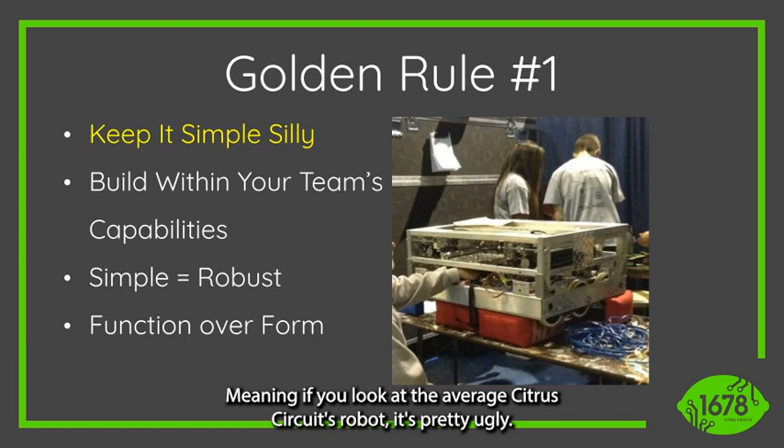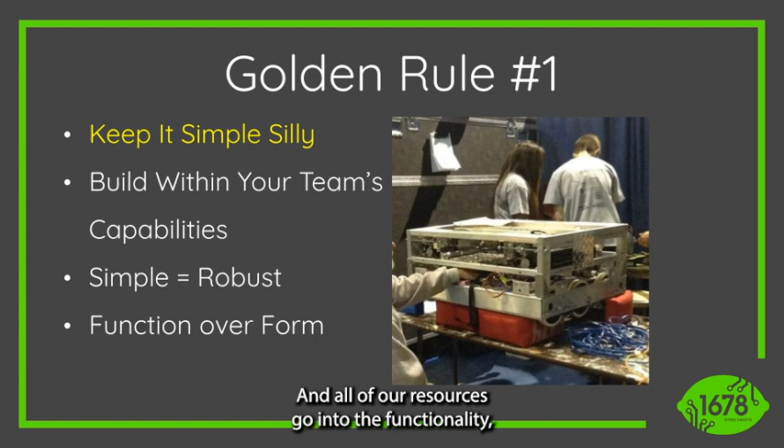This is a Citrus specific portion of flavor, but I think it's worth mentioning: we prioritize function over form. Meaning, if you look at the average Citrus Circuits robot, it's pretty ugly. There's probably going to be better looking robots at the competition, but we prioritize the function over the appearance of the robot. All of our resources go into the functionality, and we spend basically zero time on how it's going to look.

So what's the purpose of the preseason? The preseason is not a break. It's the time to train your students, try out new designs, practice new topics, and learn and research past FRC games and designs. This is the time when you have the most free resources to try new things, and spending the time as a break is a missed opportunity.

Here's some ideas for off-season projects. The training in the off-season is really important, and projects are a way to flesh a lot of different aspects of your team's workflow out at the same time. So it's not just exercise for the design team members, but a lot of these will encompass multiple areas of your team, from purchasing parts, bringing parts in, fabricating parts, obviously designing the parts, but then assembling them, wiring them up, programming them.

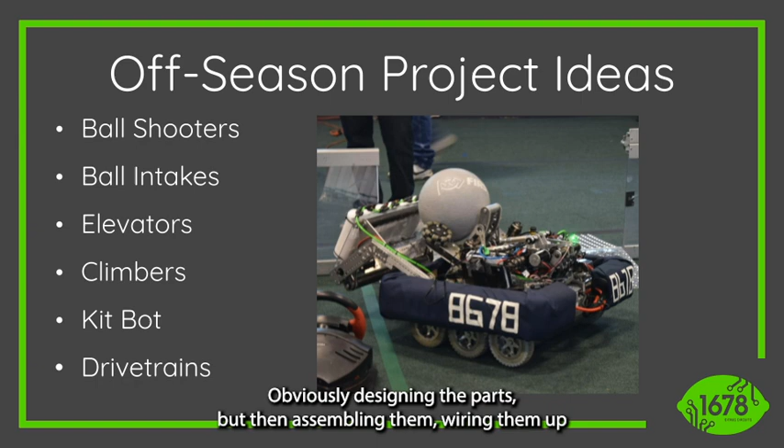So it's important to learn FRC history. FRC games are extremely repetitive in ways you might not necessarily think about. In most of the last 10 years, there's been some form of climbing. There's been 2 examples of inflated tubes, 3 if you include the inflated cubes in 2023. There were 2 examples of exercise balls. FRC is starting to love the concept of foam balls and foam game pieces, and learning how those kind of compress and shoot is something that can carry on from year to year.

And flat discs is another concept that they're trying to stick with lately. The more you learn about FRC games, what was the meta, how many game pieces were teams able to score, how did teams go about scoring the game piece, can be directly applicable to this year's game possibly.

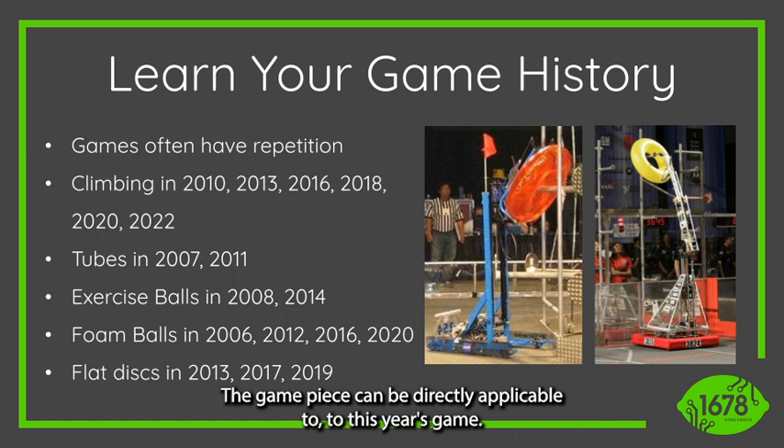Great, and that takes us into golden rule number 2. This is the second one to write down: steal from the best, invent the rest.

There's quite a few other seats if you guys are willing to spread out a little bit. There's some seats around here if you want to sit down so other people can come in. Find some open seats, there's plenty.

Thank you. But the key principle here is that, like Austin said, a lot of the games are repetitive, which means a lot of the solutions that teams have come up with are similarly repetitive. So you don't have to, as an individual designer or coder, come up with all these unique ideas. You should start with precedent, doing research, finding out what other teams have done to solve X, Y, and Z tasks.

We'll talk about this later, but this cranks up to 11 once the season starts and other people start releasing their ideas for the current game. But doing your research about past games is also really important.

There's some teams to look at. Currently, teams like 581, 2056, 6329 - these are great examples of teams that find really simple and elegant solutions to complex problems. If you're wanting to look at these robots from the past couple years, I encourage you to.

Some examples of stealing from the best and inventing the rest that 1678 has directly benefited from include our 2013 robot, which didn't start out like it looks in the upper right-hand corner. It started out as almost a totally different robot, and through the course of the season, we copied 254's intake and 973's shooter to make an amalgamation of the two that became our first robot to get to Einstein at the championship level.

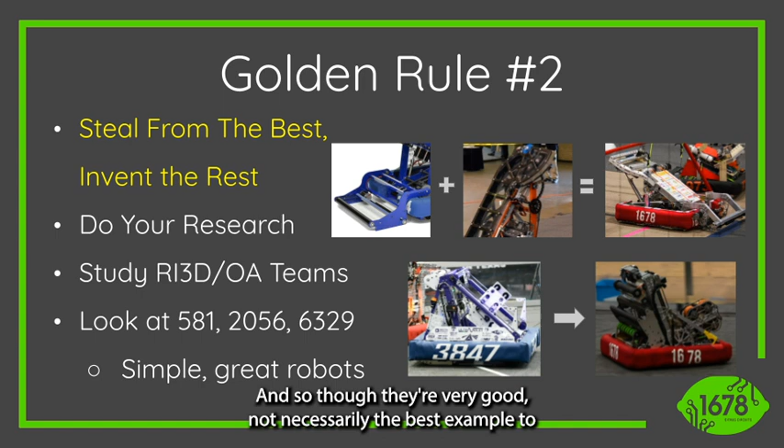One thing I did want to say, as a general rule though: don't copy 971. They build very complicated robots, and though they're very good, not necessarily the best example to copy from.

Golden rule number 3: use a proven drive base that's right for you. What we mean is if you've built an off-season robot or in another season with a drive base, you have experience building, designing, and programming that drive base, so you can quickly assemble it during the first week of kickoff. But if not, the Kit of Parts drivetrain is designed so the game can be played with it - they even sell wheel adapters at AndyMark.

So it's always a good solution for the game. I know Swerve is flashy, but if you haven't had practice putting it together and programming it during the off season, you're not going to be successful putting it together during the build season while also building a functional robot.

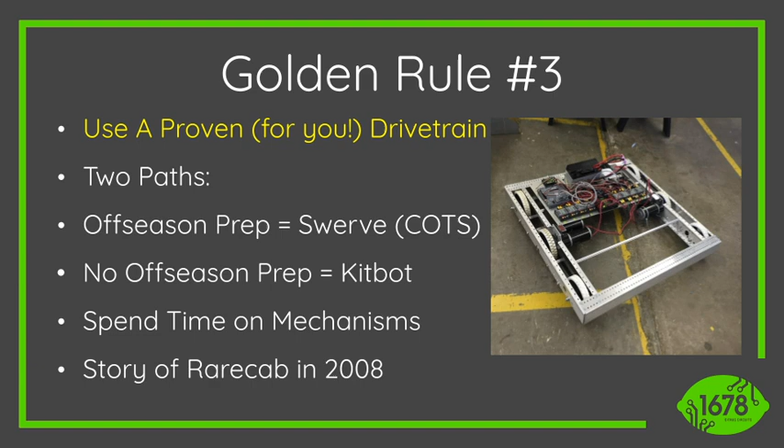The game that year had 2 components. There was a large 40-inch exercise ball that you had to launch over a high-jump-like bar, over and over again. The field was broken up with a fence in the middle, forming a little racetrack, and you were only allowed to drive counterclockwise around the field. But there were only 2 of those big 40-inch exercise balls per alliance, and there were 3 robots per alliance, so one robot wasn't going to get to launch the big exercise ball.

So this was right before I joined the team. 1678 that year decided they wanted to be the third team on the Alliance and just race around the field. And they thought the fastest way to race around the field would be to build a race car and do this totally new style of driving for them, which was Ackerman steering, where the front wheels steer just like your car and the back wheel drives.

Well, this is very different from most robots back then, which were tank drive robots. And they threw out the kit of parts tank drive that they got for free, and they instead built this crazy Ackerman steering robot. Well, this thing never really worked. The potentiometers that controlled the steering were always going out of function.

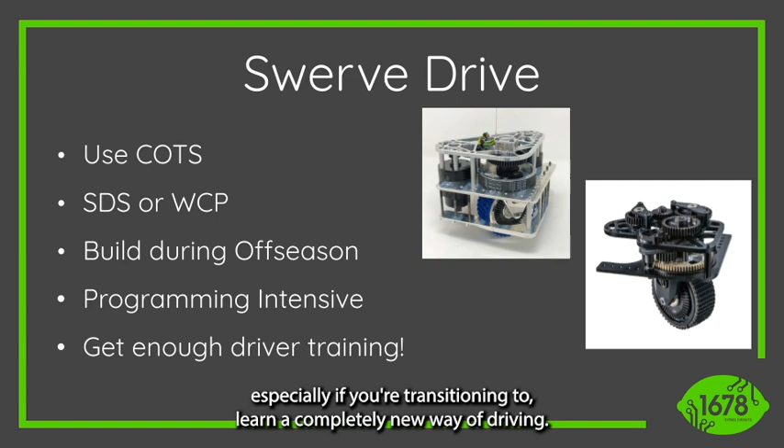Our driver is right there, and I'm sure that he can attest that it would be very different than the standard tank driving. So it's really important that you give your driver enough time, especially if you're transitioning, to learn a completely new way of driving.

All right, so let's briefly touch on mechanism design, some of the key principles to keep in mind as you're going about designing everything above the drivetrain. Some of the examples of simple robots we were sharing earlier, minimum degrees of freedom. A degree of freedom is defined as any part of the robot that needs to move relative to the other part of the robot. Degrees of freedom can get more complicated as you add them to each other, okay?

So a simple up and down elevator would be 1 degree of freedom, but it starts to get more complicated when you put an actuating wrist and maybe a clampy bit onto the end of that elevator, right? Now you're stacking degrees of freedom. And generally speaking, things get weaker, less robust, and more complicated the more degrees of freedom you have and the more degrees of freedom you stack on top of each other, okay? So thinking about minimizing that is an important part of effective robot design.

And this goes to, we talked about keep it simple earlier, and an example of Lynx being a very simple robot. Every team, doesn't matter how experienced you are, can benefit from putting less degrees of freedom on their robot, all right? Try for less degrees of freedom and then add them back if you determine you need them.

Low center of gravity, this is becoming more and more important. It used to be 10 years ago you could build a robot that was fairly unoptimized, was very tall, had some heavy stuff up top, and you'd be okay because the force that you were able to impart on the drivetrain was much lower. Robots are going twice as fast now as they did 6 years ago, okay? And especially in 2023, we saw a bunch of robots falling over because everyone was building robots like it was 1999 and it was 2023 and the robots were moving much faster.

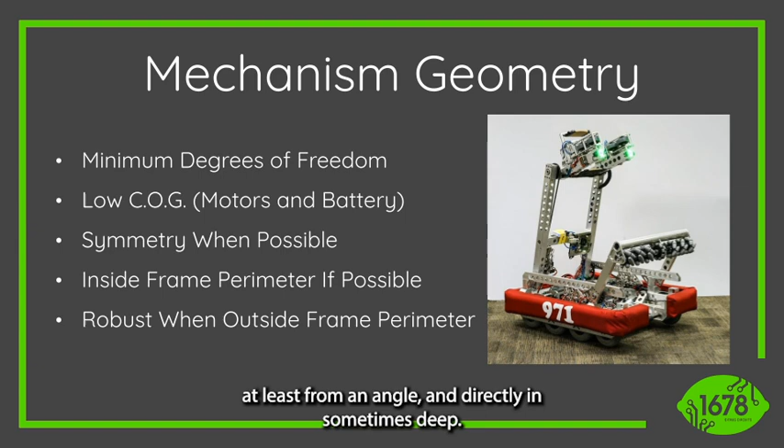Great. Okay, so with movement, there's 2 major ways to move something. There's motors. Now there's a wide range of different motors to choose from: Falcons, now Krakens, and there's a new, smaller Kraken coming out. You can have single speed or shifting gearboxes. Shifting gearboxes aren't really as necessary anymore.

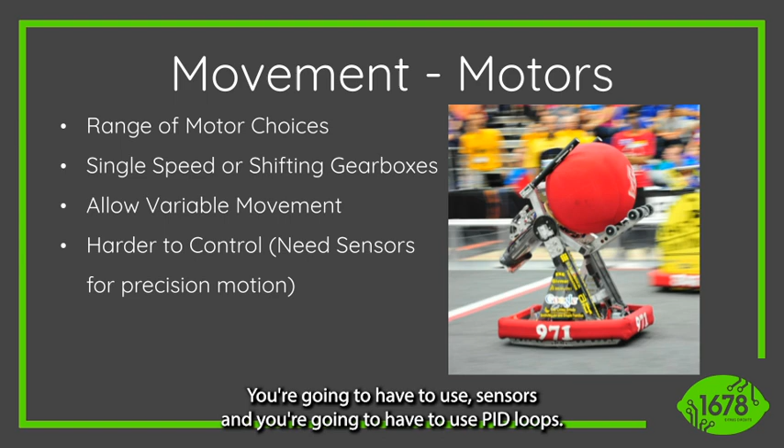But with motors being so powerful, you can just hook up some gears to it, and one Kraken can kind of move the world now. They allow for variable movement, so if you need something to go from here to here and to here, it makes it a lot easier. They are harder to control. You're going to have to use sensors, and you're going to have to use PID loops.

But with pneumatics, yeah, pneumatics are the other main mode of motion you can implement in your robots. Pneumatics, if you're not familiar, use compressed air from a compressor on board, and a solenoid, which is basically just a gate valve to choose which direction to plumb the air. Then you use that to move a cylinder rod in and out. So you can do all sorts of things with this.

The big advantages with pneumatics are they are very simple to use. They always go to one of 2 positions, which is often very convenient. It's not very software intensive either. The pneumatics can also act as a dynamic spring, which might be helpful in some applications, because if you fully extend a pneumatic and then it takes a shock impact, it'll retract slightly and then bounce back. So that can all be helpful.

Some of the downsides, and why pneumatics are becoming less and less popular: they're very power inefficient. It requires an air compressor that's a simple brush DC motor, and it generates a lot of heat. Where'd that heat come from? It came from your battery. Now your battery's getting drained faster. And then it adds another level of complication as well. If you lose air pressure for whatever reason, all of your pneumatics on the robot are not working anymore. So there are upsides and downsides.

It's still very much a viable component within FRC to use pneumatics for various functions. It can make for the simplest climb you've ever done. Actually, one of the best teams in the world this year, 2056, had a very simple and reliable pneumatic climb on their robot this year. So it's definitely worth considering, but keep in mind what the pros and cons are of adding pneumatics into your robot.

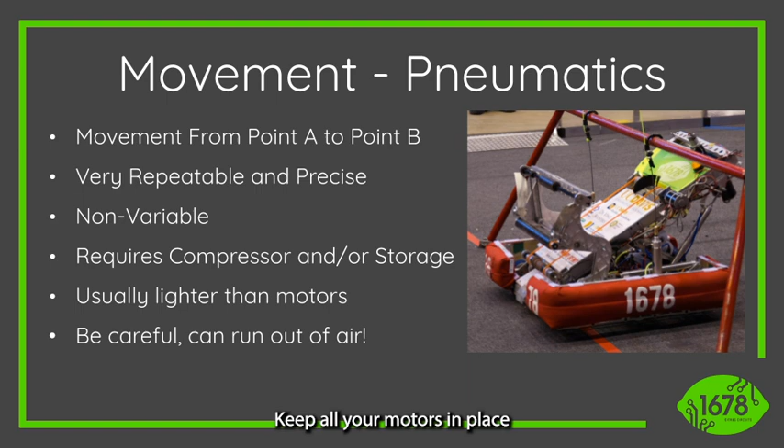Yeah, one last note on that: keep in mind there are a lot of motor slots now, but also teams are using all those motor slots, so maybe it's worth removing all the pneumatics and adding one motor instead, or vice versa, keep all your motors in place and add pneumatics in place if you have to weigh it.

So general rule of thumb: the larger the acquisition zone... or I guess, what is an acquisition zone? An acquisition zone is the effective area that you can touch a game piece and intake it from. So if I was to pick up a note this year and my intake was this big versus I could pick one up this big, I can be a lot less aligned and a lot less focused on the field and still pick up the note.

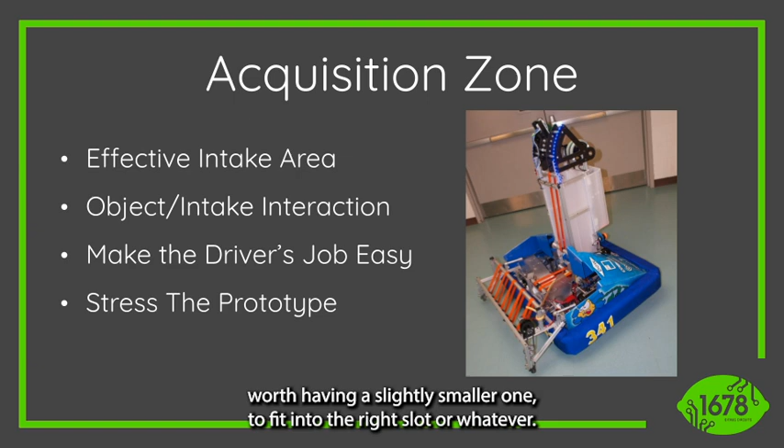It allows for easy driving and allows for the robot to not necessarily be oriented in the right way, but it's really important that you stress the prototype really hard and iterate multiple times to make sure you have the right acquisition zone for your robot. There have been times where we've built a very large acquisition zone. Our rule is normally the entire front of the robot, but because intakes get hit, maybe it's worth having a slightly smaller one to fit into the right slot.

That takes us to golden rule number 4, which is always use rolly grabbers. What I mean by rolly grabbers, a pretty obvious example this year would be most teams had an intake composed of wheels close to the ground that you would turn on, and once the game piece hit the roller, the note would go into the robot.

We call this a continuous intake because it doesn't require any very specific timing from the driver and operator to make the function happen. The operator or driver hits the intake button before you get to the note, and the thing keeps going and going, and the second it makes contact, you've acquired it and you're on your way. This is the opposite of a non-continuous intake, which would be like a claw or something else that requires specific timing to actuate and acquire the game piece.

A great example of this is back in 2014. It was another year with really big exercise balls. Our robot that year had 2 rolling intakes on it that would spin, spin, spin, and when it made contact with the ball, it would suck the ball up into the robot. Other teams had these big claws, kind of like the claws you have in Toy Story with all the aliens, the claw that grabs them. It looked like that, but on the field.

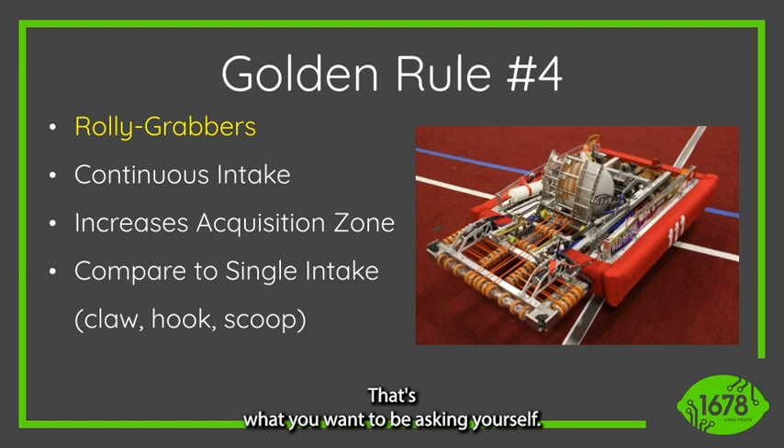So we have some robots here. Can anyone tell us, this is a little bit of audience interaction. Go to the next slide too. Oh okay yeah, we'll do all of them. So what is similar about all these robots? And the answer is not that they're blue. Any ideas? Yeah.

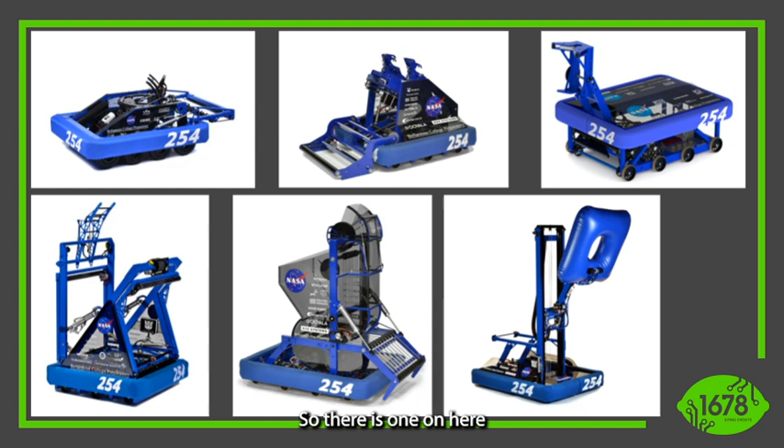So there is one on here that doesn't. Does anyone know which one and what's special about it? Okay, go forward 2 slides.

Okay, so this robot in the bottom right is the only robot that doesn't have rolly grabbers. It had a pinchy claw to grab the tube, and this is the only 254 robot to ever not win a Silicon Valley Regional that it participated in. Every other 254 robot you've seen has won the Silicon Valley Regional, except for that one, because they didn't have a rolly grabber. So that's the lesson.

Want to go over this one? Yeah, all right, great. Electrical pneumatics, really quick. This is more of an example of what not to do. This was the inside of our 2013 robot, the one I talked about earlier, where we copied a bunch of other teams and went to Einstein for the first time. One of the reasons why we didn't win champs that year is because of exactly what you see on the screen.

That was the wiring within the robot, and during semifinal match 3 on Einstein, somewhere in that mess of wire there's an air compressor, and somewhere else there's a wireless radio. The air compressor wasn't bolted down, and the wireless radio wasn't bolted down, and the air compressor slid into the wireless radio and unplugged the Ethernet cable, so we were dead for half of our last match of that season. If we had been following this advice that year, we probably would have made it a little bit further by paying more attention to the wiring inside the robot.

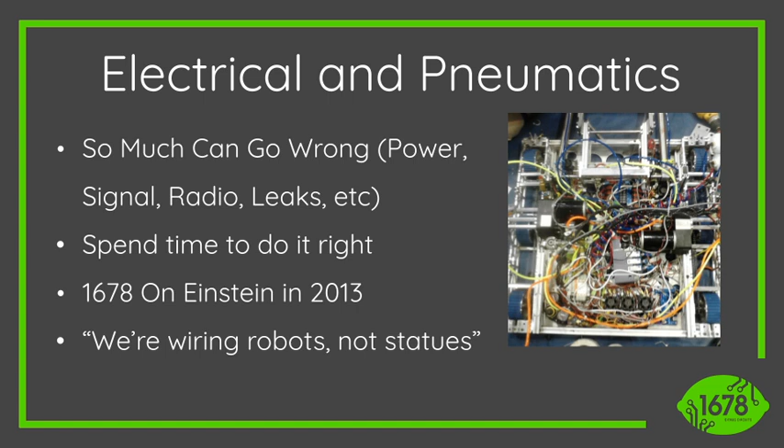So play around with how you're wiring things, make adjustments, and use a lot of strain relief. Even a little bit of wire mass, when you're at 10 Gs, can multiply and cause itself to fatigue over time and get failures within the robot. So you have to do proper strain relief, especially in this day and age where robots are moving faster than ever.

This is an outdated slide, but a general thing all programmers need to be aware of is that autonomous is more important than ever now. They're designing games that can be won or lost in auto, especially in early weeks of competition. So it's really important to use the built-in encoders on the motors in conjunction with a gyro, and to have some form of vision alignment.

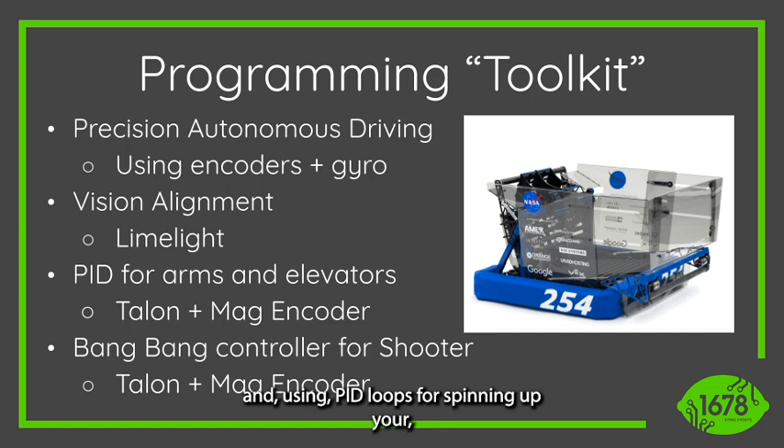There's now April tags on the field, so they're giving you locations, hoping you use them to align. Using the Limelight is a great COTS solution for this. There are now a lot more teams using their own solutions, including ourselves, but the Limelight works great. You're going to have to use PID loops for all your arms and elevators, making sure they're being controlled to the right specific location, and using PID loops for spinning up your shooter motors is important too.

All right, let's talk about build season. Questions at the end—if you have questions, save them for the end.

In build season, when planning out what your season's going to look like from kickoff through to competitions, it's important to set an accelerated schedule for yourself. The saying here is aim for the moon, land among the stars—the implication is you need a very aggressive schedule because there's a high likelihood you miss it, and you want your miss to still be within a reasonable time window.

If you plan your schedule so that your last auto is being programmed the night before competition, that is not a recipe for success, because any slip in that schedule means that last auto you need before competition never gets written. So you need to set a really aggressive schedule.

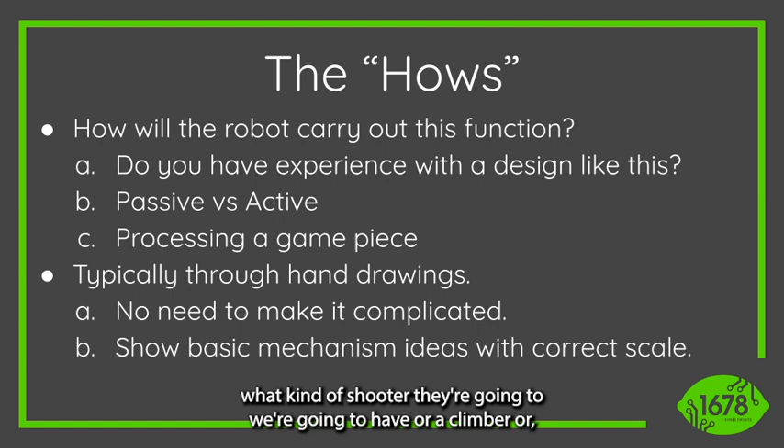And then how would you process that game piece? One thing that we even struggle with is everyone wants to focus on what kind of shooter we're gonna have, or a climber, or even the intake, but nobody thinks about how it goes from the intake into the robot where it can be stored, and then into the shooter or scoring mechanism.

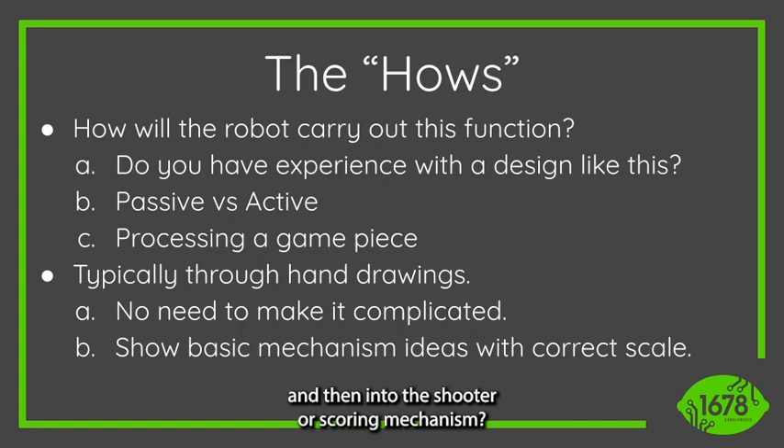That's something we struggled with a lot this year, especially in a game where I think First is going to be having a lot more either 2-game-piece games, or a game where you do 2 tasks with a game piece. I think it's really important to think about how the game piece not only goes from point A to point B, but now possibly to point C.

And how can you make sure that all of this fits into your frame perimeter? It's really important to show your concepts, not just say, I'm thinking of this arm, it kind of goes like this, picks it up, brings it in. It's really important to draw out your ideas, because someone might be imagining a completely different concept with your word description, and drawing it out makes it a lot easier.

It doesn't need to be a complicated CAD, it can just be a simple hand drawing, but it's really important to make sure things are to scale so that someone else seeing it, who will be criticizing, critiquing, or accepting that design, has the same idea in their head that you had in yours.

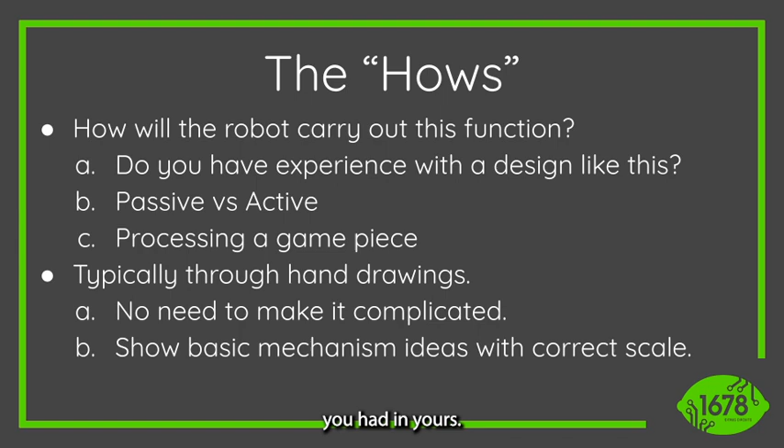Okay, so that's the first 3 days of season. All of our process around the first 3 days is what we just went over. Very dense first 3 days, but as I talked about earlier, it sets the trajectory for the whole season. And then we go into the first couple of weeks of season.

That takes us into a ton of prototyping, drive base, electronics layout in the drive base, kind of building up the foundation of the robot, fabricating and assembling the drivetrain, which goes along with wiring it. We begin writing code for mechanisms and systems we expect to have, so the software team starts getting going on the overall structure. Obviously they don't have a robot yet to dial stuff in, but they're getting the basics done. And then assembling the alpha robot, which is going to take us to the next slide.

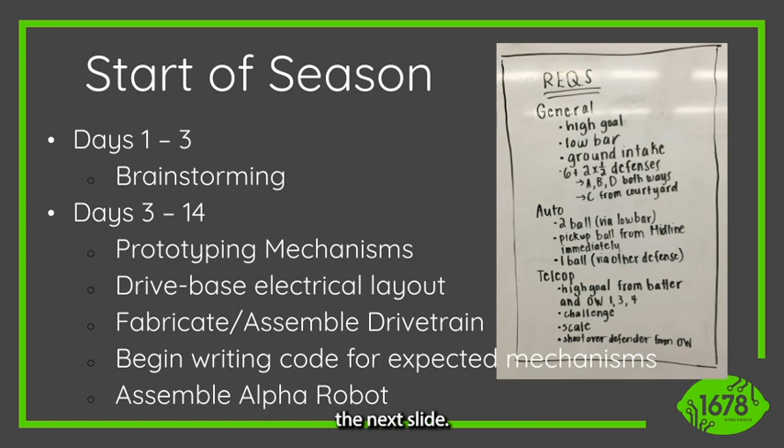So starting in 2022, we started building what we call an alpha bot, which is just a functional prototype, which is all of our different prototypes kind of built and mounted onto a single drive base.

This robot is not legal. The intake prototype is just mounted on there. It does not retract into its frame perimeter. It violates the frame perimeter, or it violates the height restrictions.

It's just a way for us to test our auto paths with a shooter or scoring mechanism and an intake. It allows us to start our driver practice early, and it allows us to understand your prototypes in reference to the field and the game piece, the way that you're going to be playing it.

There's been a lot of times where we've tested out our prototypes, and while it's in the prototype stage where it's isolated, it works great, but then once we put it together, we realize that the geometry of it doesn't fit with all of our other prototypes and what we're imagining for our robot, or that it just doesn't work in terms of realistically driving up and scoring.

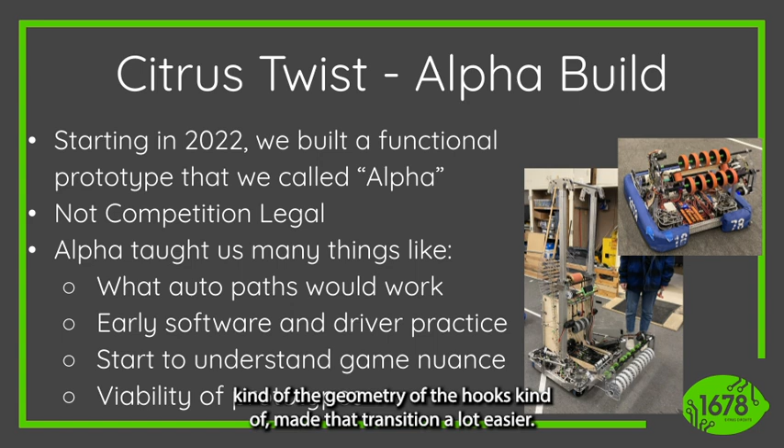A really good example was our climber in 2022. We used the 125 chopstick method, and it didn't work at all once we put it on our beta bot, and we had to literally throw it into the garbage and start from scratch. Having that alpha bot where we knew the geometry of the hooks made that transition a lot easier.

This takes us into the mid-season push, going from week 2 through week 4. Like Austin talked about, we have that alpha robot usually done around day 10, and the next 2 weeks are all about building mechanisms. All the stuff that goes on top of the drivetrain starts to take shape in the next couple of weeks, so hopefully by the end of week 3 going into week 4, most of the robot is built.

Then it's all starting to come together into a final robot assembly that the electrical team can take and wire up and get all the routing just right, and then the software team can start to do bring-up on the various mechanisms to get the robot working.

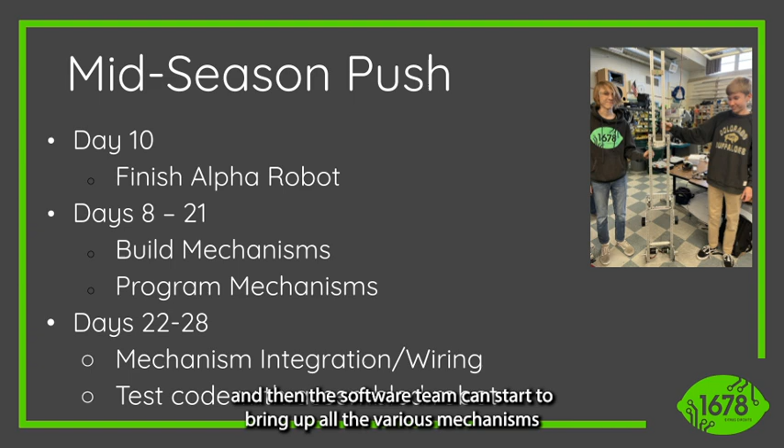By the end of week 4, our robot should be more or less finished. That's when we go into full testing mode. Our robot is on the field as much as possible.

We break our robot constantly, every driver practice, so we know exactly where the intake tends to be failing, or we can't score in this method. It allows us to spend as much time testing them and finding the failures in the shop, so we can solve those problems and have them fixed when we compete.

Every good team fails just as much as every other team, but they do it in their shop rather than on the field, because they spent the time and gave their drivers enough time to break the robot so it didn't break at competition. That's Golden Rule 5: fail faster.

Driver practice is really important. My concept is that before your first competition, you should have at least 20 hours with the robot driving. It doesn't actually need to be 20 hours on the sticks, but 20 hours of your robot operating and finding those issues. Having your drivers get practice scoring with your robot will probably put you in the top 5 alone at your first competition.

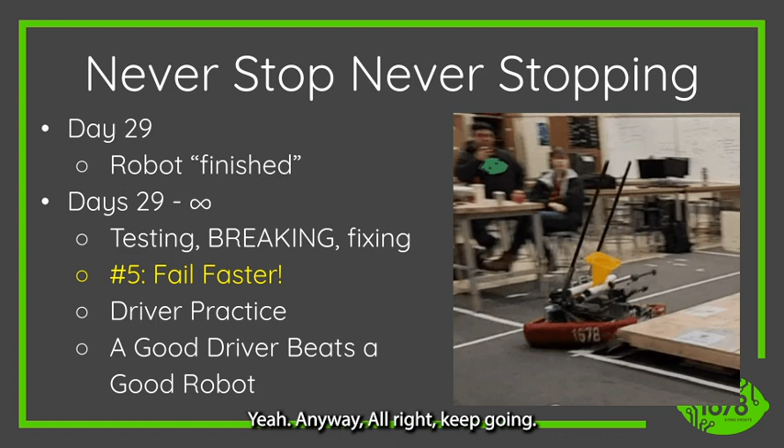All right, getting to the competition season: do not stop iterating on your robot.

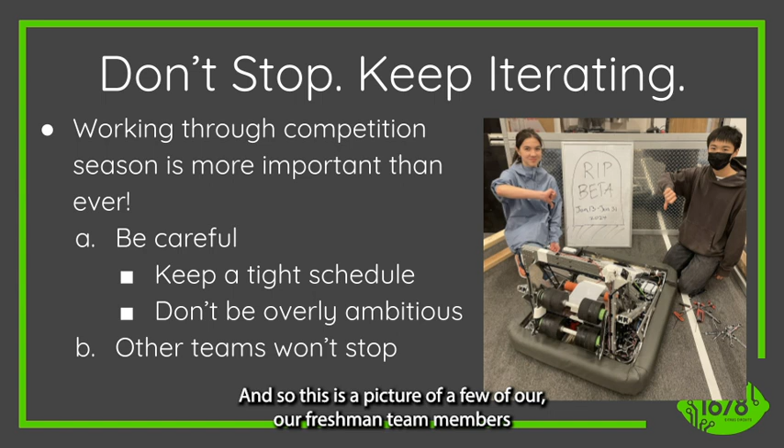This is an example picture from this past season. This was our beta robot that we thought we were going to be competing with all year, and it turned out to be terrible. This is a picture of a few of our freshman team members responsible for disassembling it, basically the robot's funeral. This robot lived from January 13th to the 31st.

January 13th to the 31st, so basically less than 3 weeks of life this robot had before it was taken apart, and we went in a totally different direction with our 2024 robot. So the point here is that the work doesn't stop.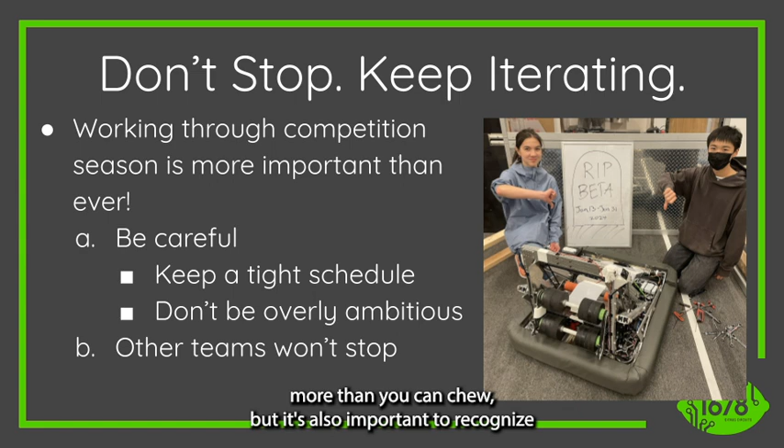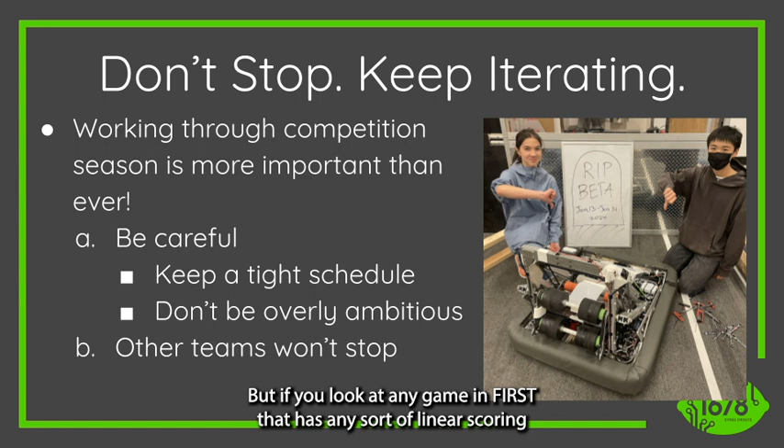I think it's important to be careful and not bite off more than you can chew, but it's also important to recognize that everyone else is constantly improving. The game, if you look at any game in FIRST that has any sort of linear scoring capability, the scores always improve over the course of the season.

Week 1 scores are always lower than week 3 scores, which are always lower than week 6 scores, which are always lower than champs scores, except for a couple of district events, but for the most part. So the robots continually get better, and in this new era of FIRST, where there's no bag, no stop build, none of that, you have to be improving over the course of the season if you want to stay competitive.

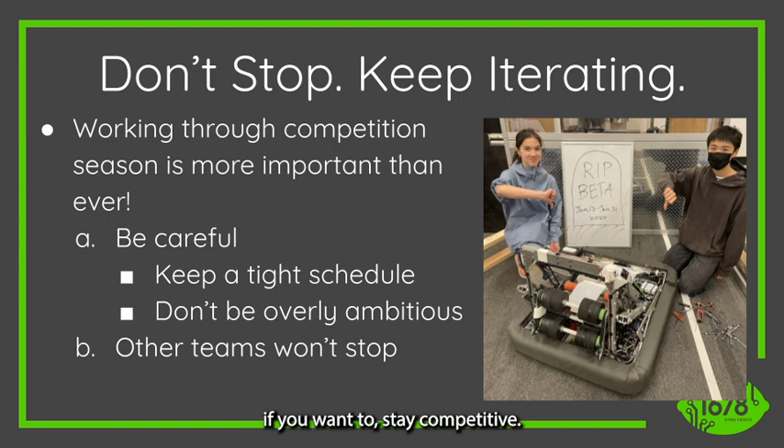And part of that is learning what everyone else is doing. Watching other competitions is part of the key to our success, where we don't just have this magical way of knowing what the meta is of every game. Every year we see what 2056 is doing, and we then see what other teams are doing at their competitions, what's successful, what kind of autos they're running, because odds are someone else is smarter than you and figured out the answer.

And so it's really important. We have a pancake breakfast every year to watch week 2 events, because we normally compete in week 1, and it's our first time. We have all of our students come, we watch the events, we have everyone read Chief Delphi. There's a bunch of new shows on Fun and RSN that talk about how teams did at competition, what a robot's doing, what's successful, what's not.

Volunteering at events is a really good way to see robots up close, to get an in-person look at what that robot is doing and what makes it capable of doing that. And it just allows you to look at everyone else and get general ideas of how you can tweak your robot, or tweak your strategy, or your auto, or your programming, just to make the most of the robot that you have.